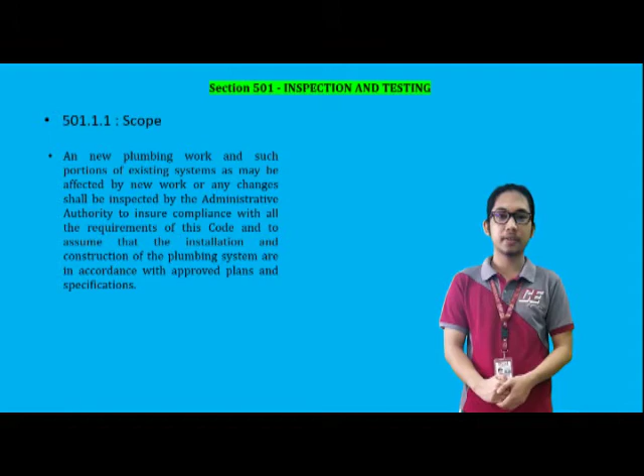Proceeding to its sections, here we go to section 501.1, Inspection. Under its subsection, scope: if there are any changes done in a building where some portions of the plumbing system are affected or undergo any changes, inspection shall be done by the administrative authority. This is done to ensure compliance with this code.

Advance notice: if you are the registered and licensed master plumber, it is your duty to inform that the installed plumbing system is ready for inspection three days before or earlier.

Responsibility: it is the duty of the permit holder to make sure that the installed plumbing system will pass the prescribed test before notifying the administrative authority who will do the test. The permit holder is the assigned registered and licensed master plumber, as stated in section 101, to whom permits may be issued. It is also his duty to provide all the equipment and facilities required.

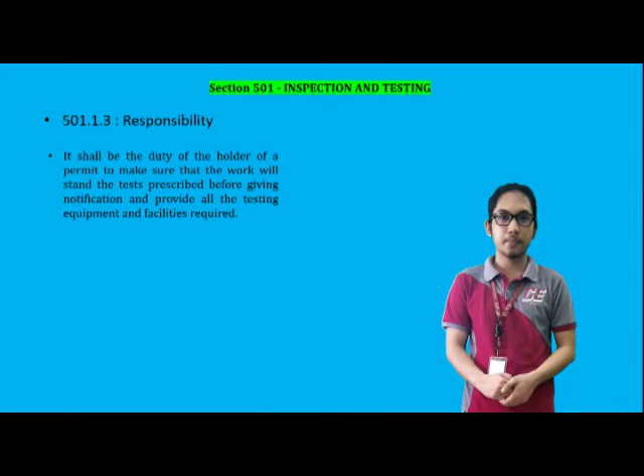Retesting: after the inspection is done by the administrative authority and it is found that the work has failed the test, corrections shall be made and the work will be submitted for another test or inspection. But still, the permittee shall provide an appropriate appearance fee for the inspector, even if the said work has failed the test.

When we say appearance fee, it is the amount of money we should pay to a person for taking part in the said event, such as inspection.

Tests: in any case, the test must be conducted in the presence of the administrative authority or its appointed representative. The inspector must witness the process of the inspection during the scheduled time to ensure that the work has purely passed or failed the test.

Corrections: going back to the testing section, I stated earlier that the necessary corrections shall be done when the work has failed the test. In this section, the said corrections or violations shall be written by the administrative authority itself and hand-delivered to the permittee or the master plumber at the site of work. In some cases, it shall be sent by registered mail directly to the permittee or its authorized representative.

Approval: when the said work or installed plumbing system has completely passed the test, a certificate of approval will be issued by the administrative authority to the permittee whenever it is required.

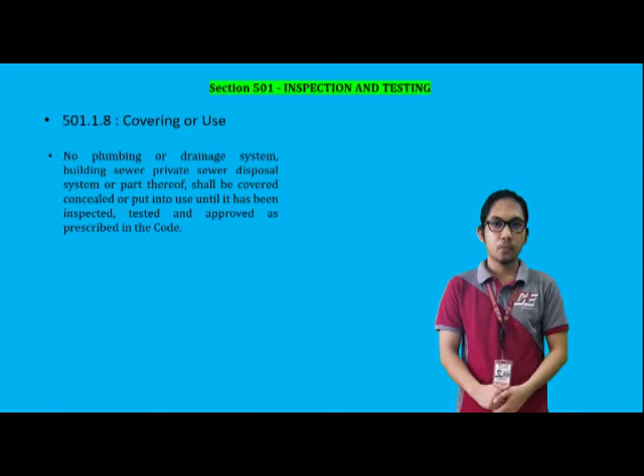Covering or use: all plumbing works such as drainage system, building sewer, private sewer disposal system, or any part of it shall not be covered or put into use unless it is already tested and approved by the administrative authority. The work must pass the test first before covering or utilizing.

Uncovering: as I said earlier, the work must be inspected and approved first before covering or using it. Now, if the said work or any part of the plumbing system had already been covered, all the covered part shall be uncovered for inspection and testing, as provided in this section.

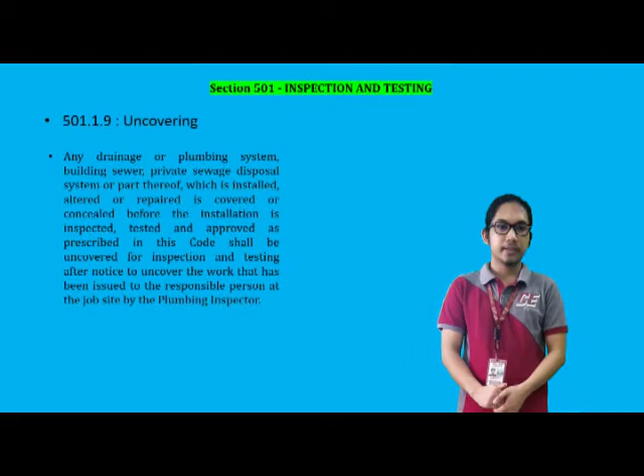Now, next section, Testing, section 501.2. As you have noticed, testing is separated from inspection. Is there any difference? The answer is yes. By referring to different definitions from the internet, I would briefly say that inspection is the process of reviewing anything and documenting the observed data, and that data will be the basis for testing. While testing generally means to test the object or subject to find its limits.

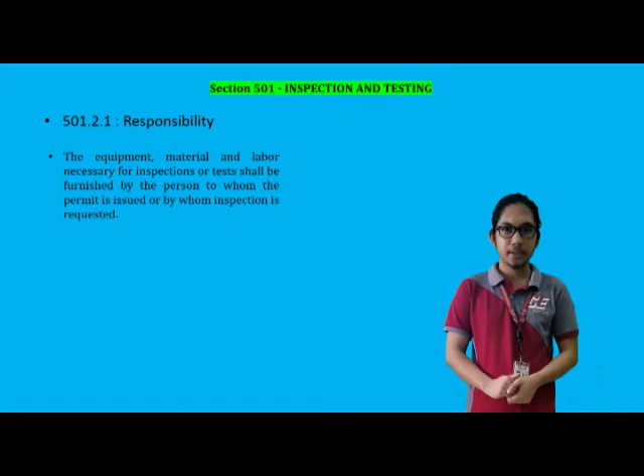Responsibility: again, it is the responsibility of the assigned, registered, and licensed master plumber to provide the equipment, material, or labor necessary for the inspections and tests. Media.

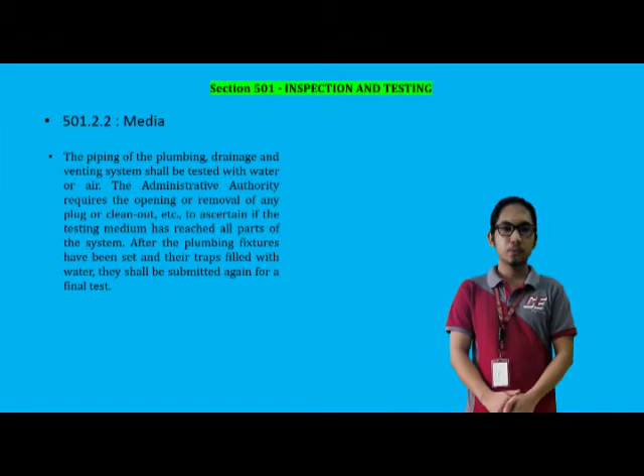During the inspection, all plumbing, drainage, and venting system pipings shall be tested with water or air. All plugs or cleanouts shall be removed to check if the testing medium, water or air, has reached all throughout the system. After that, the traps will be filled with water and shall be resubmitted again for the final test.

Water test: this test is done to check if there is any leakage in the whole system. Before the application of water, all openings in the piping shall be tightly closed except the highest opening, to see if the water has overflowed in the system.

If the system is tested in sections, each opening shall be tightly plugged except the highest opening of the section under test, but no section shall be tested with less than a 3-meter head of water, except the uppermost 3 meters of the whole system.

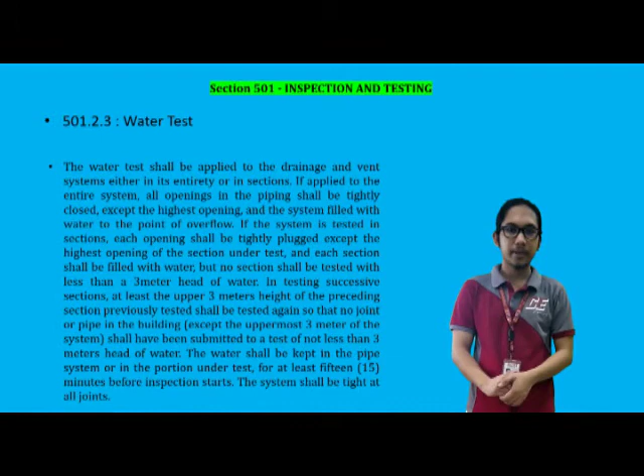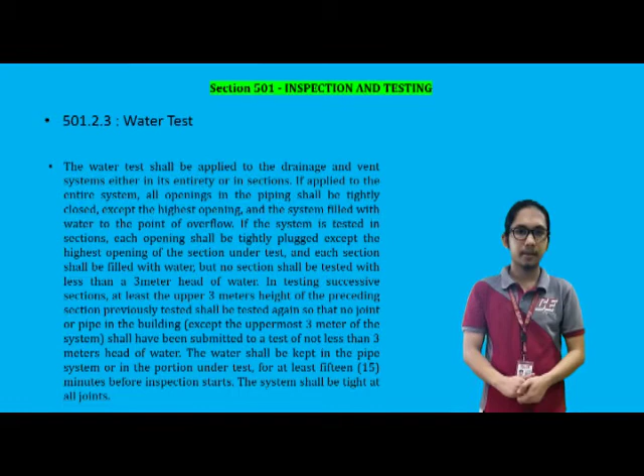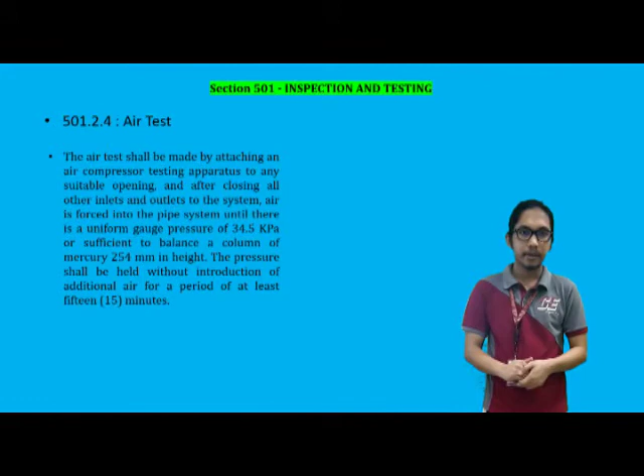Air test. In air test, an air compressor shall be attached to any suitable opening while closing all inlets and outlets of the system. The pipe system shall have a uniform gauge pressure of 34.5 kPa, or to balance a column of mercury which is 254 mm in height, after the air is forced into the pipe system. The pipe shall maintain the required gauge pressure for at least 15 minutes.

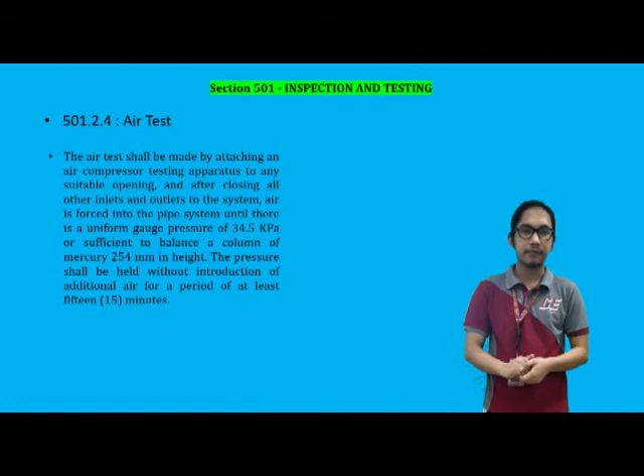Building sewer test. This test is done to check if the building sewer is watertight at all points when it is connected to any available public sewer or private sewage disposal system.

It is stated in this section that the building sewers shall be tested by plugging the end of the building sewer at its point of connection with the public sewer or private sewage disposal system, and completely filling the building sewer with water from the lowest to the highest point thereof, or by such other tests as may be prescribed by the administrative authority.

Water piping. Upon completion of a section of the entire hot and cold water supply system, it shall be tested and proved tight under water pressure not less than the working pressure under which it is to be used, plus 50%. For example, if you have 50 kilopascals of working pressure, 50 plus 50% of 50, which is 25, will be 75.

Therefore, the system shall hold 75 kilopascals of water pressure when tested. A pressure of 344.5 kilopascals of air may be substituted for the water test. Either method shall withstand the test without leaking for at least 15 minutes.

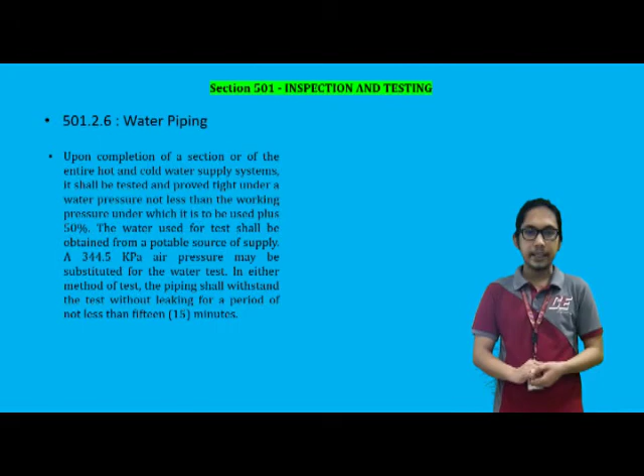For defective systems, an air test shall be used in testing the tightness condition of the drainage or plumbing system of any building premises when there is reason to believe that it has become defective, only if the inspector had noticed some defects such as insanitary condition of the said system.

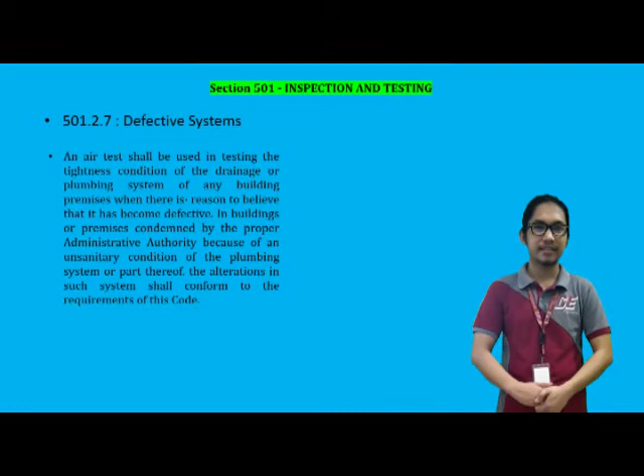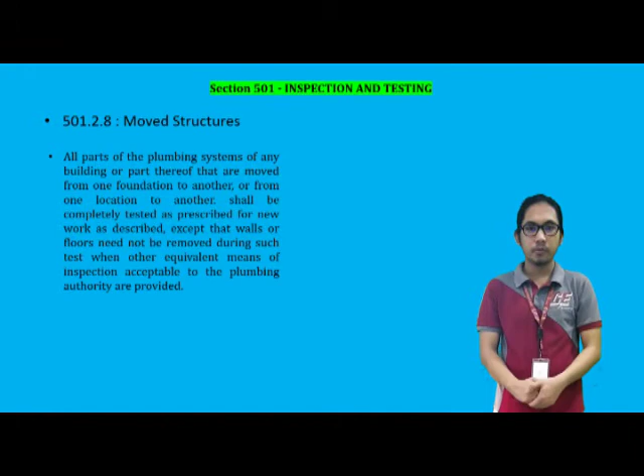For moved structures, whenever all or some parts of the plumbing system of a building are moved from one foundation or location to another, it shall be completely tested again in the same process as the newly installed plumbing system, except that walls or floors need not be removed during such test, as all coverings must be uncovered when the inspection is done. But still, another means of equivalent inspection shall be done.

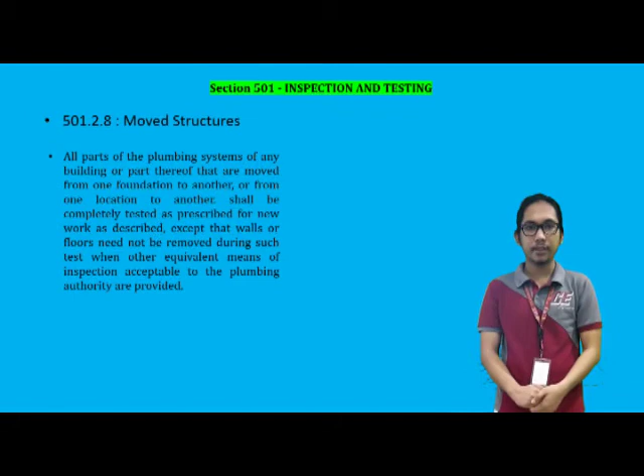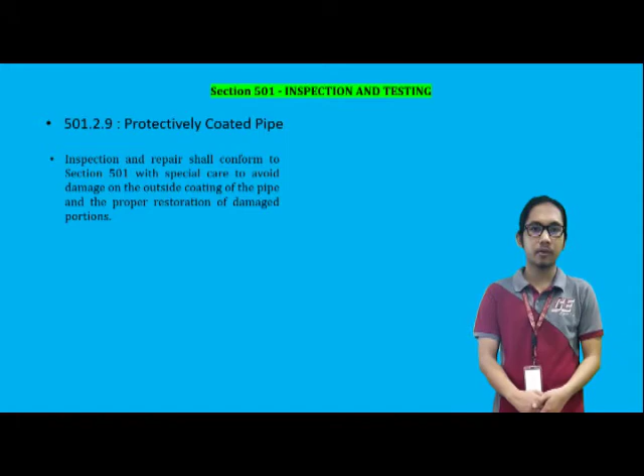Protectively coated pipe. The person involved in inspection and testing must be careful to avoid any damage to the outside coating of the pipe, as conformed to Section 501.

Test for shower receptors. Shower receptors shall be tested for water tightness by filling the water to the level of the rough threshold. The test plug shall be placed so that both upper and under sides of the subpan should be subjected to the test at the point where it is clamped to the drain.

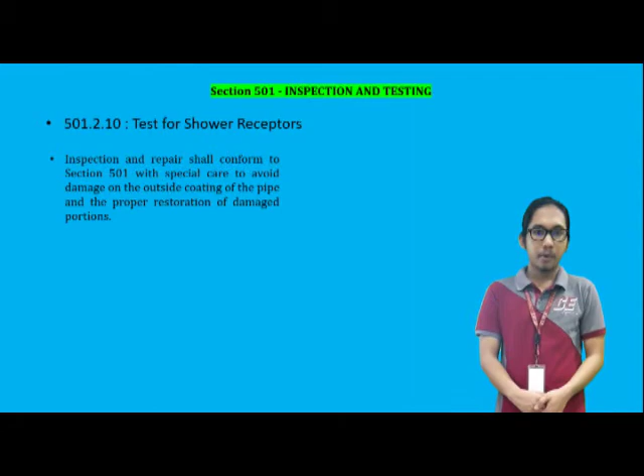And that's all for Section 501, Inspection and Testing.

Proceeding to the next section, Section 502, Maintenance. Under this section, the owner or his agent shall maintain the plumbing and drainage system of his premises under the jurisdiction of the plumbing authority in a sanitary and safe operating condition. So, in this section, the owner just needs to maintain the installed plumbing and drainage system.

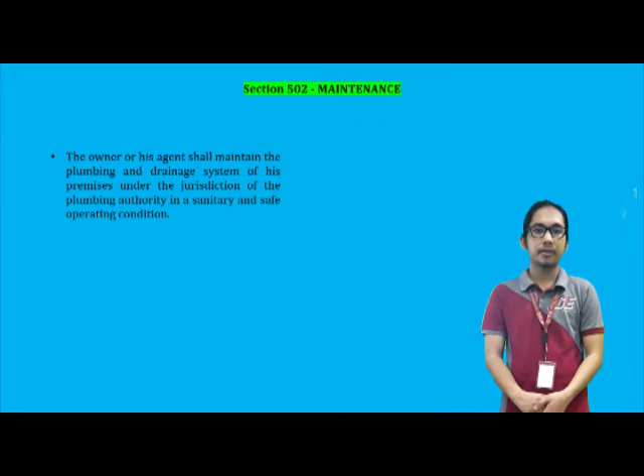This can be done by hiring a master plumber who will check and repair if any leakage or defects are detected. Next section, Section 503, Existing Construction.

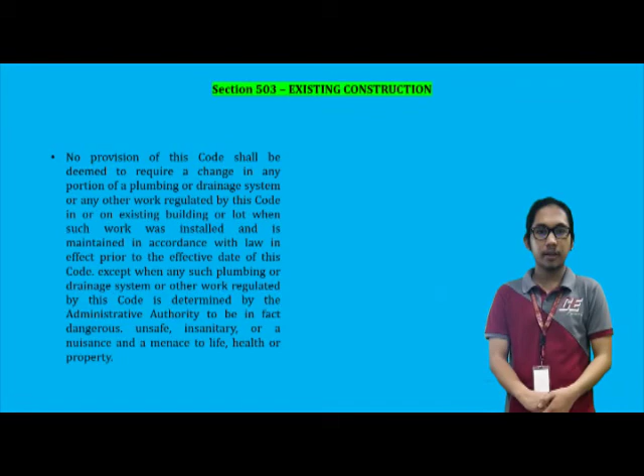If there is already an existing plumbing or drainage system, there shall be no need for any changes as long as it is installed and maintained properly in accordance with the law prior to the effective date of this code, except when determined by the administrative authority that it is in fact dangerous, unsafe, insanitary, or a nuisance and menace to life and property.

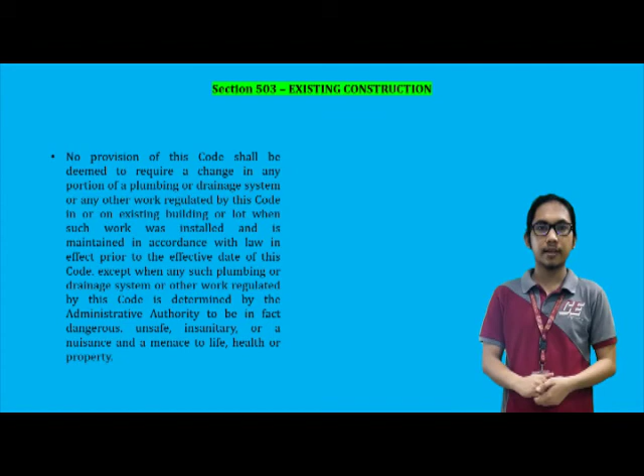And here we go to the last section of this chapter, Chapter 5 of the Revised National Plumbing Code of the Philippines. Section 504, Health and Safety.

This section simply provides that any plumbing system must be repaired or installed with additional plumbing and drainage facilities if determined or observed that there is any nuisance or other dangerous or insanitary condition in which health or safety hazard is concerned.

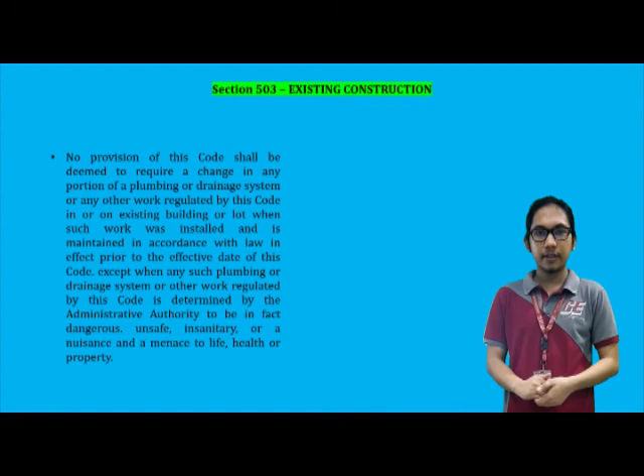So that is all the sections covered in Chapter 5 of the Revised National Plumbing Code of the Philippines. That is all of my part, and thank you for watching my video.